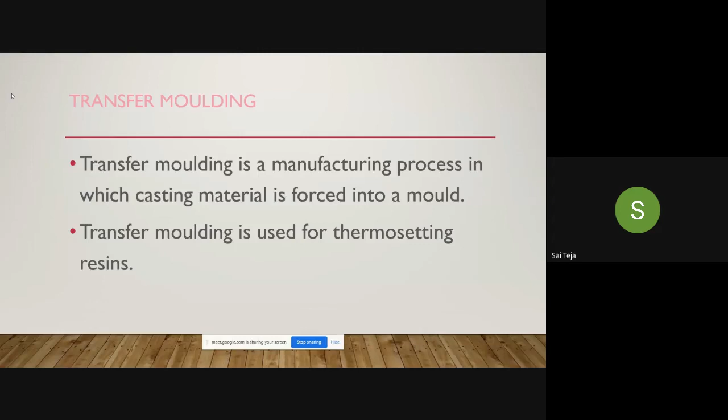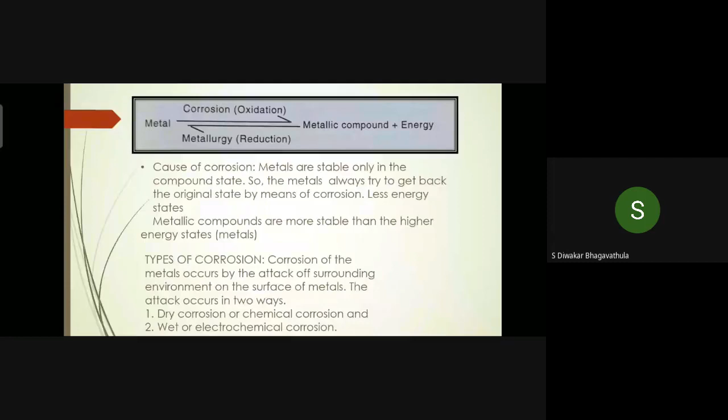Initially, when we are extracting metals, they occur in combined states as oxides, hydroxides, etc. When we want pure metal, we extract them, but metals have a tendency to be stable in their combined form, so they undergo oxidation and form metallic compounds. This process is nothing but corrosion. So metal always tends to corrode and go back to the combined state. If by reduction we get the metallic compound back to the metal, so the reverse process of extracting metal from the metallic compound is corrosion.

Generally, the causes of corrosion: metals are stable only in their compound state, so they get back to their original state by the means of corrosion.

Less energy states, metallic compounds are more stable than higher energy states. Higher energy state means metals; low energy state means their combined forms.

Types of corrosion: corrosion of metals occurs by the attack of the surrounding environment on the surface of the metals. Generally these are of two types: dry corrosion and wet corrosion. Dry corrosion is also known as chemical corrosion, and wet corrosion is electrochemical corrosion.

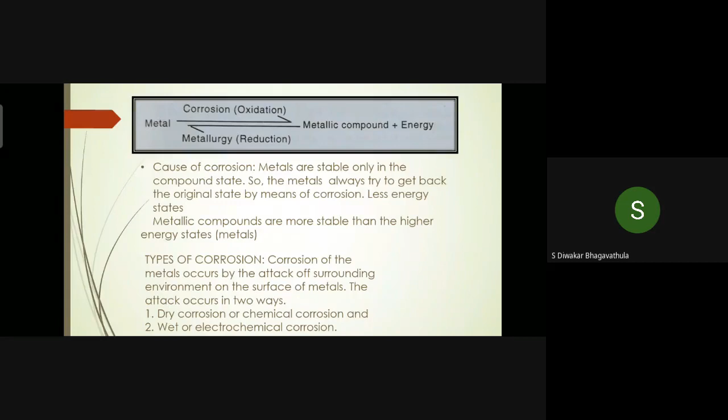As my topic is dry corrosion, I am going to explain dry corrosion. This type of corrosion occurs mainly through the direct chemical action of atmospheric gases such as oxygen, halogens, etc. on anhydrous inorganic liquids with metal surfaces in immediate proximity.

The extent of corrosion depends on two qualities: the chemical affinity between the corrosive environment and the solid metal.

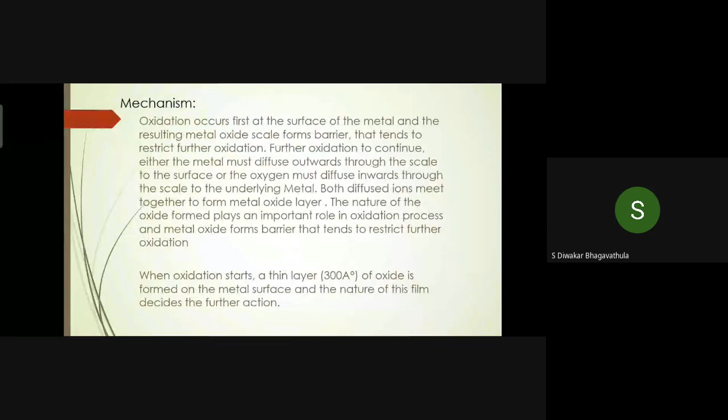The oxidation starts, a thin layer of oxide is formed on the metal surface, and the nature of this film decides the further action.

Here, metal plus oxygen gives metallic oxide near the surface of the metal, which is the corrosion product. That film decides whether the metal should further oxidize, corrode, or not.

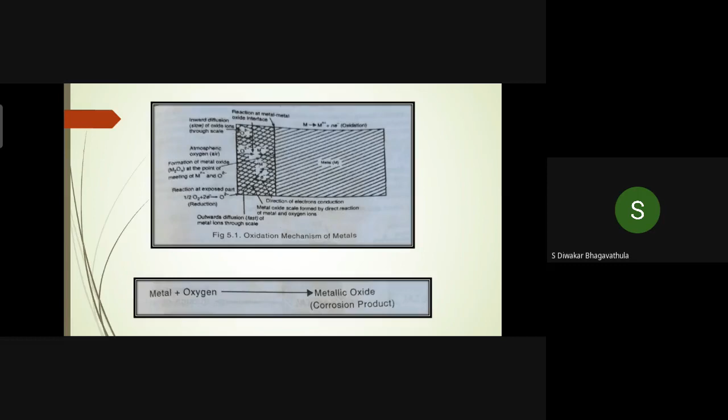This film is of four types generally: unstable oxide, stable porous oxide, volatile oxide layer, and so on. First, unstable oxide: if the oxide layer is formed and decomposed back into metal and oxygen, then the film is called unstable oxide.

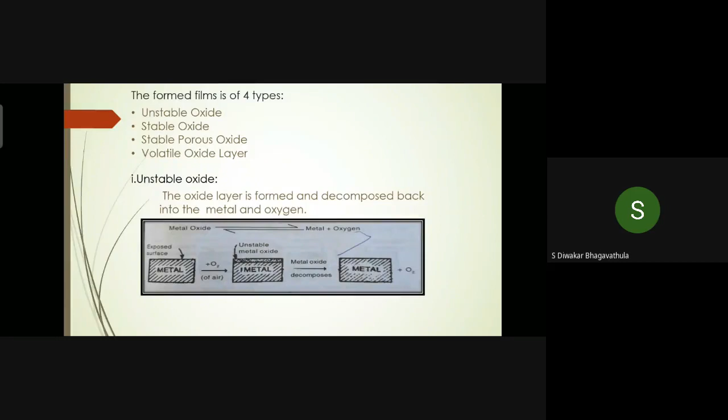Stable oxide: a stable, non-porous oxide layer adheres tightly to the metal surface and forms an impervious layer. When the film is stable non-porous oxide, it sticks tightly to the surface of the metal, so it prevents the metal surface from any further contact with atmospheric oxygen. It does not allow atmospheric oxygen to react with the metal anymore. Such a film behaves as a protective coating in nature, thereby shielding the metal surface.

Aluminium, tin, lead, copper, etc. are examples of this. Their metal oxide films are stable, adherent, non-porous, and impervious in nature. Consequently, further oxidation is prevented. So, a stable oxide layer prevents further oxidation of the metal.

Stable porous oxide. Stable porous oxide layers have pores and cracks. In such cases, atmospheric oxygen has access to the underlying surface of the metal through the pores or cracks of the layer. Thereby, corrosion continues unobstructed till the entire metal is converted into oxide.

These stable porous oxides have small pores through which atmospheric air can react with the metal. It does not stop until the metal gets fully corroded. That means the metal is completely converted into oxide. Alkali earth metal oxide layers. Further attack will go on continuously from these pores or cracks.

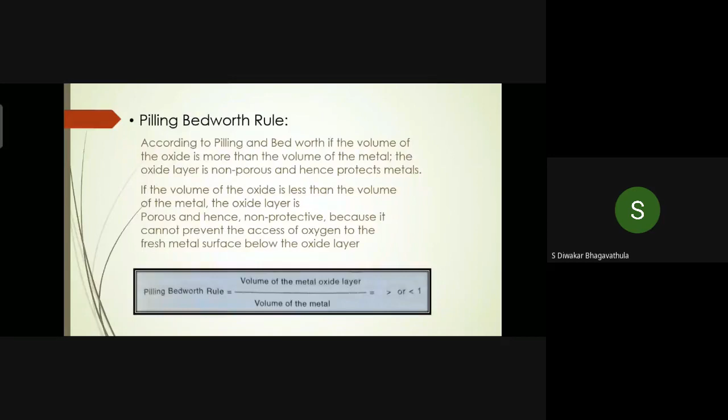The formula is given there. Pilling-Bedworth ratio is volume of the metal oxide layer by volume of the metal. If it is greater than 1, it is non-porous, and if it is less than 1, it is porous. So according to this we can say whether a metal can corrode easily or not. If you know the volume of the metal oxide layer and the metal, we can know that.

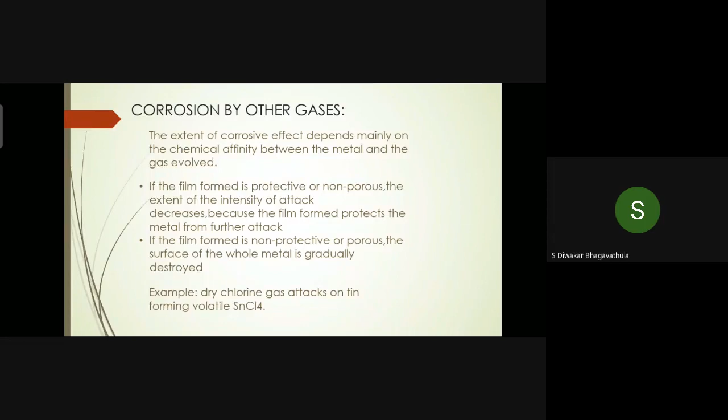Coming to corrosion by other gases, the extent of corrosive effect depends mainly on the chemical affinity between the metal and the gas evolved. If the film formed is protective and non-porous, the intensity of attack decreases because the film protects the metal from further attack. If the film formed is non-protective and porous, the surface of the whole metal is gradually destroyed by corrosion. Example, dry chlorine gas attacks tin forming volatile SnCl4.

Liquid metal corrosion. It is due to chemical action of flowing liquid metal at high temperature on solid metal or alloy. Such corrosion has been found to occur in devices used for nuclear power. The corrosion reaction involves either dissolution of the solid metal by the liquid metal, or internal penetration of liquid metal into the solid metal. If the solid metal has some pores or holes, when liquid goes inside, the metal tends to corrode.

Thank you. Okay, ma. Any questions regarding this chemical corrosion? No questions? Okay, I have one question. Yes, sir.

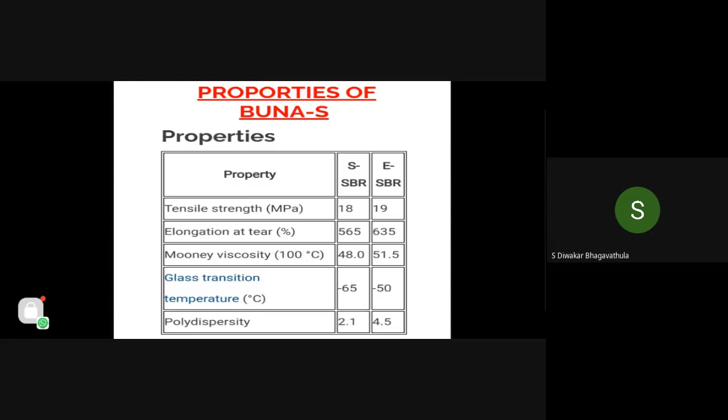Properties of Buna-S. There are several properties like tensile strength, elongation at tear, viscosity, glass transition, and polydispersity. And let us discuss what is Buna-S. The monomers are 1,3-butadiene and styrene. It is formed by the polymerization of 1,3-butadiene and styrene in the ratio of 3:1 in the presence of sodium. And Buna-S is an example of copolymers.

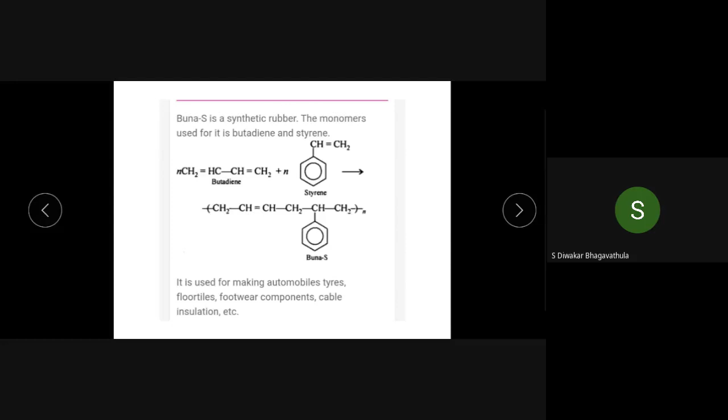It is also called styrene butadiene rubber. It has significantly less resistance to friction than natural rubber. It is used for making automobile tires and rubber soles. Its commercial name is SBR. And let us see the structure of butadiene and styrene. This is the structure of butadiene, and this is the structure of styrene. Butadiene and styrene undergo copolymerization to form Buna-S.

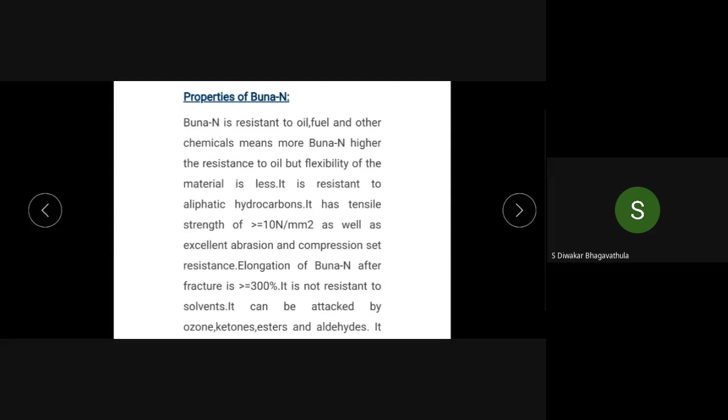Properties of Buna-N. Let us see what is Buna-N first, and discuss afterwards. Buna-N is an elastomer, and I forgot to say that Buna-S is also an elastomer. Buna-N is known as nitrile rubber. It forms due to the copolymerization of acrylonitrile and 1,3-butadiene.

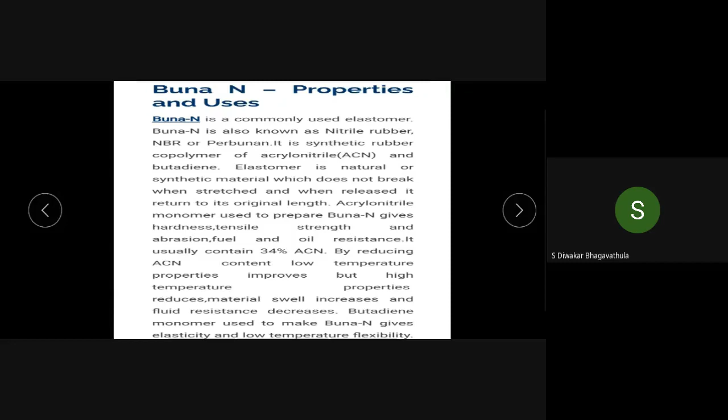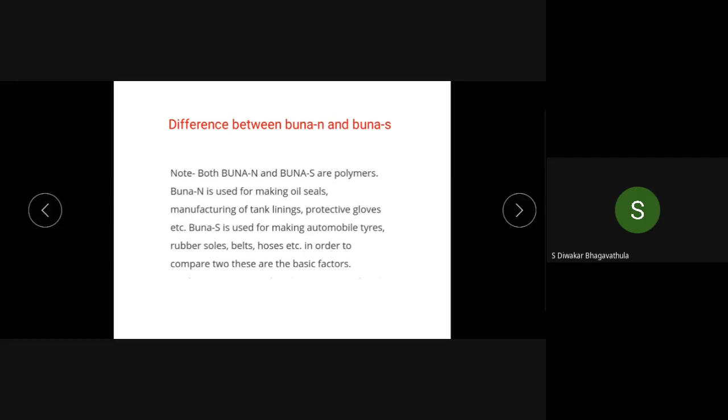The difference between Buna-N and Buna-S. Both Buna-N and Buna-S are polymers. Buna-N is used for making oil seals, manufacturing of tank linings, protective gloves, and Buna-S is used for making automobile tires, rubber soles, belts, hoses, etc. In order to compare the two, these are the basic factors.

And what are the uses of Buna-S and Buna-N? Buna-S is used for making automobile tires, rubber soles, belts, hoses, as we discussed previously. And to compare the two, these are the basic factors.

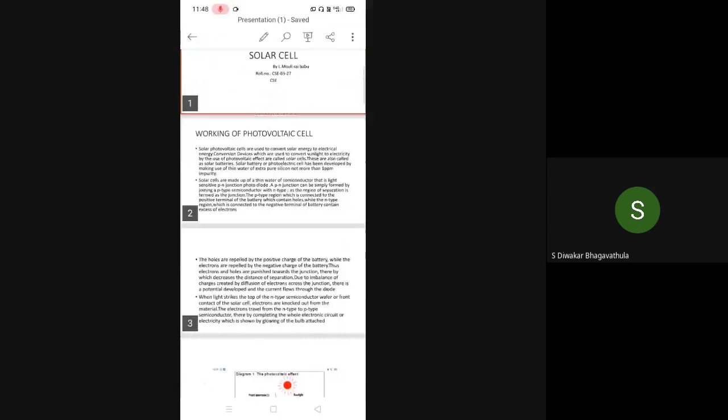Good morning, sir. My name is L. Mouli Sai Babu from CSE C section. My topic is working and construction of photovoltaic cell or solar cell. Working of photovoltaic cell. Solar photovoltaic cells are used to convert solar energy to electrical energy.

Mauli. Yes. Can you expand your screen or can you rotate your screen so that we can see it very clearly?

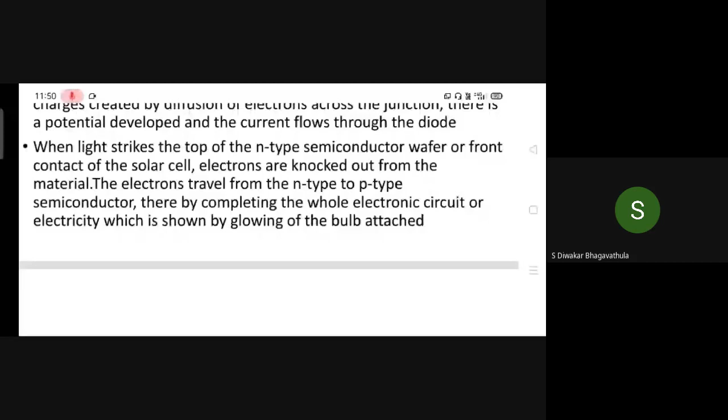Thus electrons and holes are pushed towards the junction, which decreases the distance of separation. This means formation of a depletion region due to the imbalance of charges created by diffusion of electrons. Across the junction, a potential is developed and current flows through the diode. When sunlight strikes the top of the n-type semiconductor wafer or front contact of the solar cell, electrons are knocked out from the material. The electrons travel from n-type to p-type semiconductor, completing the circuit, which is shown by the glowing of an attached bulb.

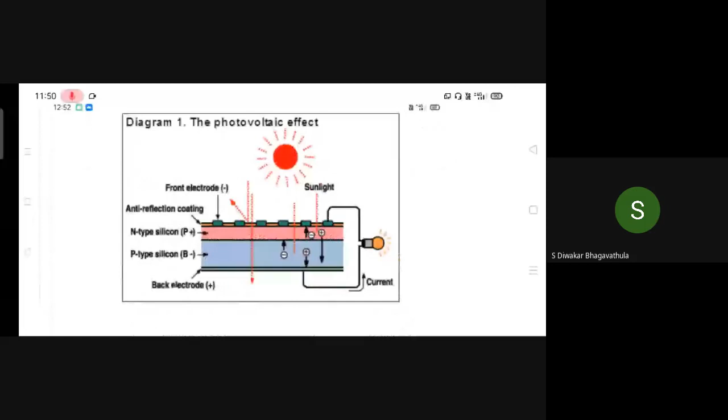Now this is the diagram, sir. N-type and p-type. The sunlight is falling on the n-type and the electrons are moving towards the p-type junction. The n-type is doped with elements like arsenic or phosphorus, and the p-type is doped with boron or aluminum, etc. Each solar cell is very small, and a series combination of many such solar cells gives rise to a photovoltaic module or solar battery. So solar energy can be converted directly into electrical energy by photovoltaic cells.

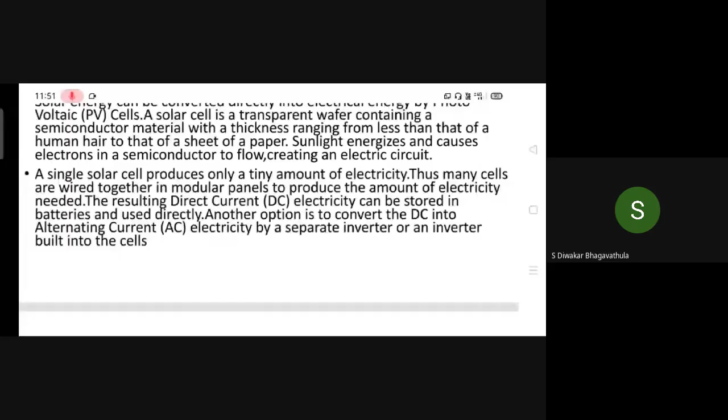A solar cell is a transparent wafer containing a semiconductor material with a thickness ranging from less than that of a human hair to that of a sheet of paper. Sunlight energizes and causes electrons in a semiconductor to flow, creating an electric circuit. Meanwhile, electricity is stored and the bulb glows, as in the diagram.

A solar system contains many parts: solar array, a blocking diode, battery storage, load, power conditioning, switch and circuit breaker. Your voice is breaking. Your voice is breaking.

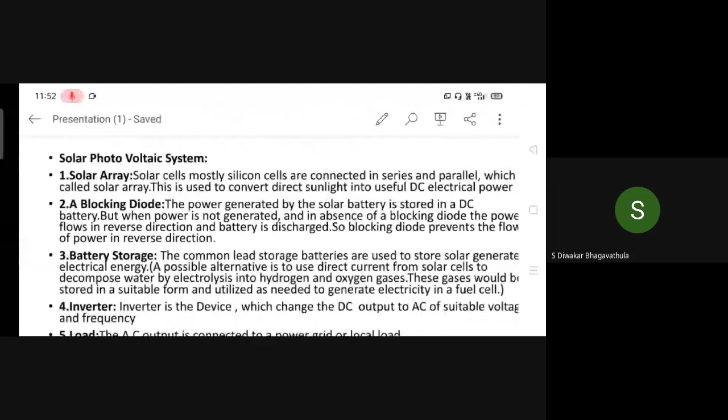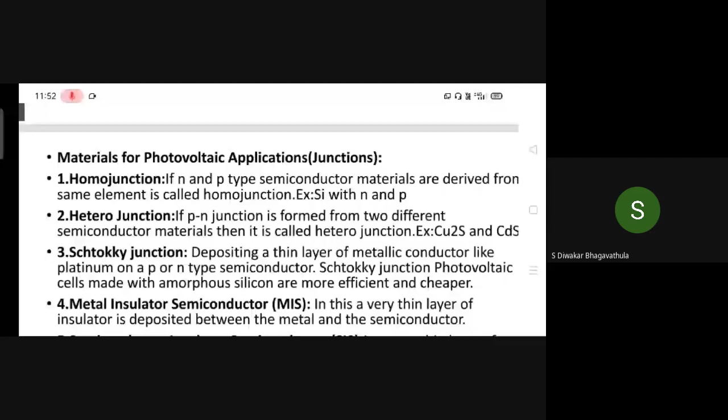Solar photovoltaic system. They contain many parts: solar array, a blocking diode, battery storage, power conditioners and circuit breakers. The material junctions: homojunction. If N and P type semiconductors are derived from the same element, it's called a homojunction, for example silicon with N and P. Heterojunction: if a p-n junction is formed from two different semiconductor materials, it is called a heterojunction. Example: Cu2S and cadmium sulfide.

Schottky junction: depositing a thin layer of a metallic conductor like platinum on a P or N type semiconductor. Schottky junction photovoltaic cells made with amorphous silicon are more efficient and cheaper. Metal insulator semiconductor: a very thin layer of insulator is deposited in between the metal and the semiconductor. Example, tin oxide in between silicon. Liquid interface solar cells are formed using the top surface of a liquid.

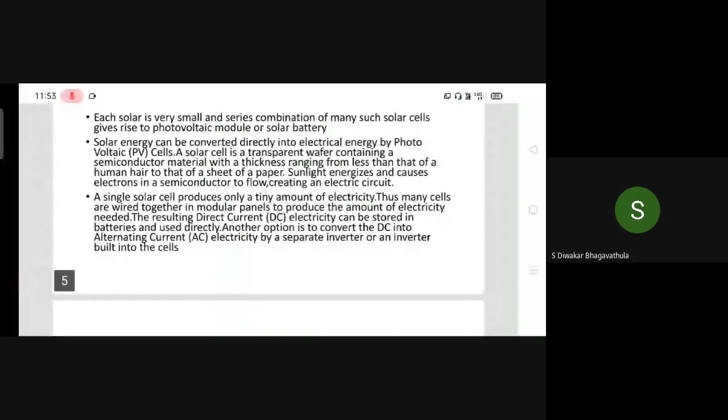Solar energy applications, for example: flat plate collector for water heating by solar energy, solar cooker, solar furnace, solar power plant, and solar cells and solar panels. Materials used in solar cells: silicon. Over 95% of cells in commercial production are silicon p-n junction, while consumer items are now using amorphous silicon p-n cells. Band gap is 1.1 electron volt. Experiments have demonstrated that a silicon cell could convert about 15% of terrestrial sunlight into electricity.

And silicon cells of N or P type structure are used, along with gallium arsenide, cadmium sulfide, and cadmium selenide, etc. Thank you. So, any questions regarding these solar cells? Doubt, sir.

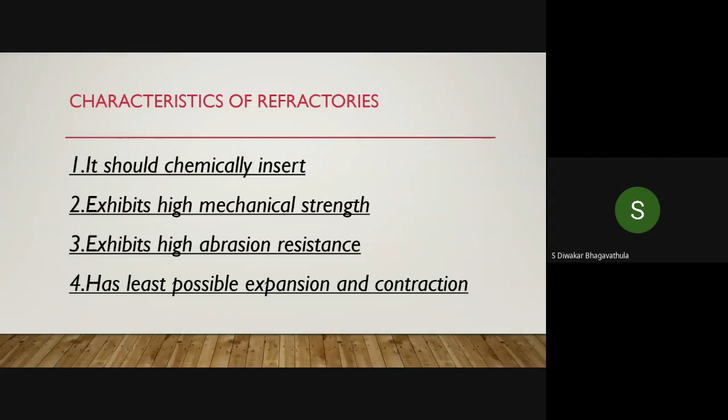Characteristics of refractories: they should be chemically inert, exhibit high mechanical strength, exhibit high abrasion resistance, and have the least possible expansion and contraction. Types of refractories based on chemical composition or nature are classified into 3 types: acidic refractory, basic refractory, neutral refractory.

Acidic refractories consist mostly of acidic materials and are used only in acidic environments. Example: fire clay, SiO2, etc.

Basic refractories consist mostly of basic materials and are used in basic environments. Example: magnesium oxide, dolomites, etc.

Neutral refractories consist of neutral raw materials and are used in both acidic and basic environments. Example: graphite, zirconia, SiC, etc.

Based on fusion temperature, refractories are classified into 3 types: low refractories, high refractories, and super refractories. Low refractories are at a temperature of 1600 to 1800 degrees centigrade, example fire clay. High refractories are at 1800 to 2000 degrees centigrade, example chromites and silica. Super refractories are at temperatures greater than 2000 degrees centigrade.

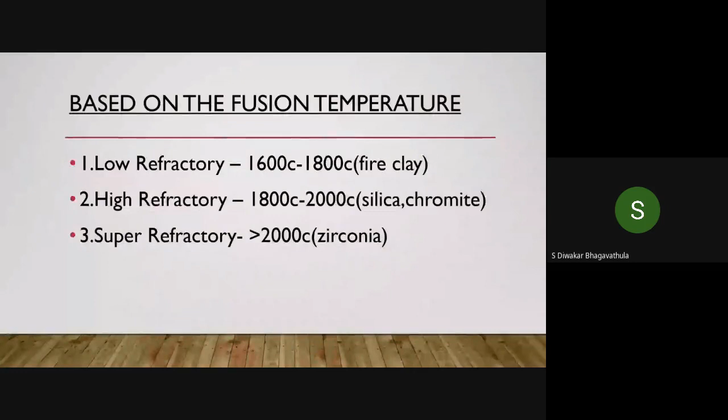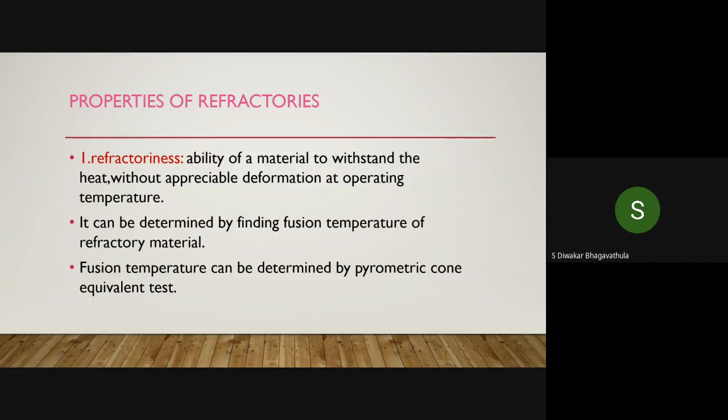Example: zirconia. Now the properties of refractories. First, refractoriness: the ability of a material to withstand heat without appreciable deformation at operating temperature is called refractoriness. It can be determined by finding the fusion temperature of the refractory material, which is determined by the pyrometric cone equivalent test.

The temperature at which the refractory deforms under its own weight is known as the fusion temperature. These cones are pyramidal, having a height of 38 millimeters, a triangular base, and 19 millimeter long sides. They are heated under 10 degrees per minute, and as a result undergo fusion at different temperatures. This temperature at which fusion or softening of the test cone occurs is shown by the apex touching the base. So the temperature at which the apex touches the surface is the fusion temperature, and by that we find the refractoriness of the refractory material.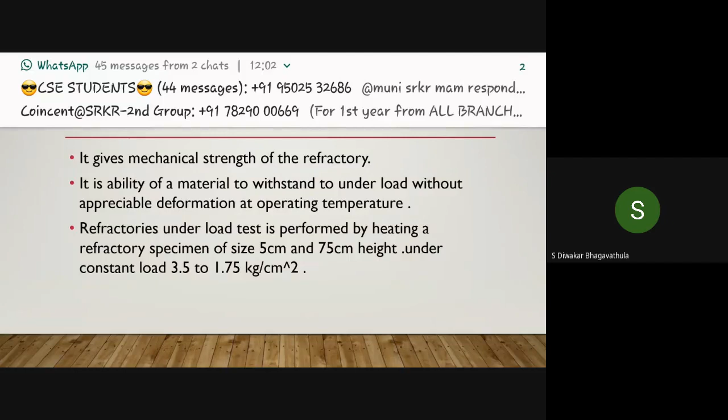Refractoriness under load, or strength, gives the mechanical strength of the refractory. It is the ability of a material to withstand load without appreciable deformation at operating temperature. The refractoriness under load test is performed by heating a refractory specimen of size 5 cm square and 7.5 cm height under a constant load of 1.75 to 3.5 kg per centimeter square, and it can be found by plotting a graph between deformation height of the refractory and the temperature.

Next, dimensional stability: resistance to any volume change at operating condition is called dimensional stability. Permanent expansion occurs when one crystalline form of a refractory is transformed into another crystalline form of lower density. Example: quartz to tridymite to cristobalite. The specific gravity of quartz is 2.65 and cristobalite is 2.32, so the decrease in density causes permanent expansion.

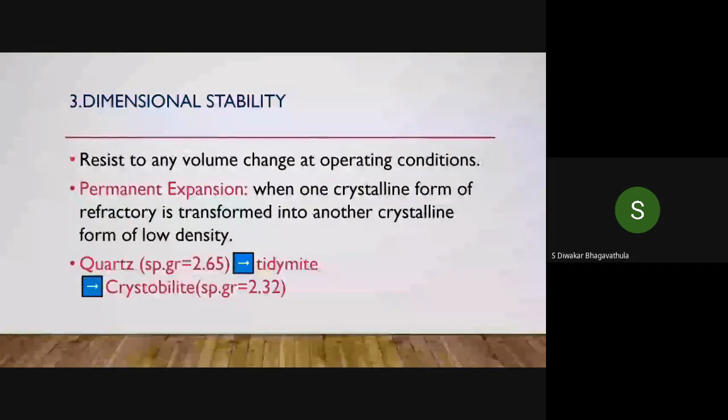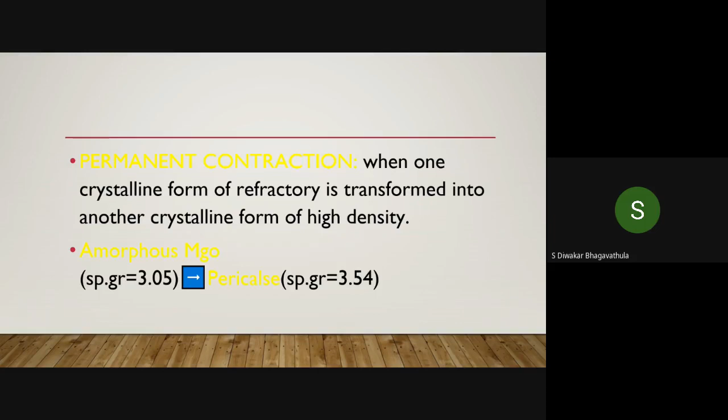Next, permanent contraction: when one crystalline form of a refractory is transformed into another crystalline form of higher density, it is called permanent contraction. Example: amorphous magnesium oxide to periclase. The specific gravity of magnesium oxide is 3.05 and periclase is 3.54, so the increase in specific gravity causes permanent contraction.

Next, porosity: porosity is the ratio of pore volume to bulk volume, P equals W minus D by W minus A into 100. W stands for weight of the saturated specimen, D stands for weight of the dry specimen, A stands for weight of the saturated specimen submerged in water. It is a very important property of refractory bricks because it affects many other characteristics like chemical stability, strength, abrasion resistance, etc. So a good refractory generally has low porosity.

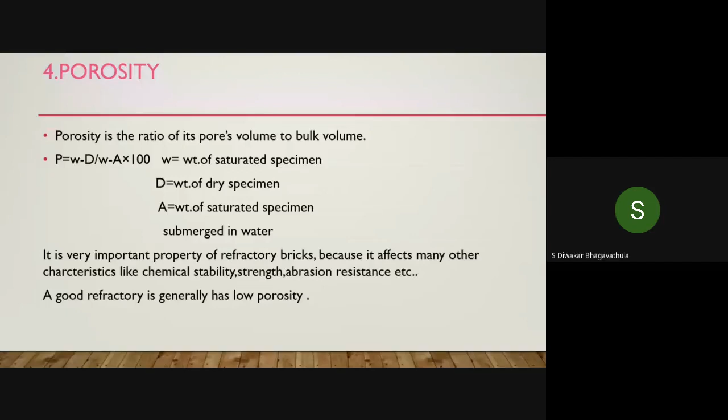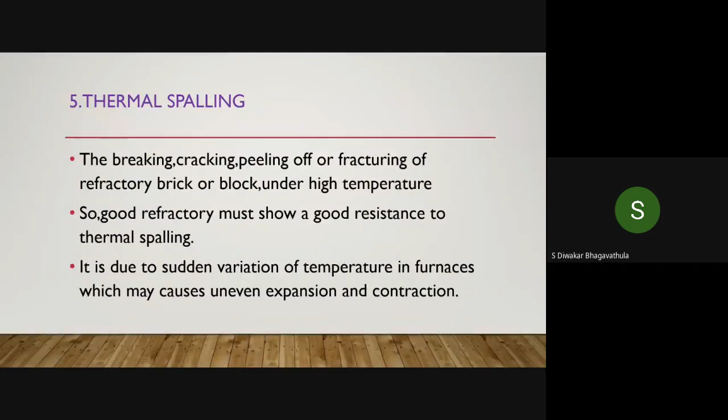Thermal spalling is the breaking, cracking, peeling off, or fracturing of a refractory brick or block under high temperature. A good refractory must show good resistance to thermal spalling. Thermal spalling occurs due to sudden variation of temperature in furnaces, which causes uneven expansion and contraction. These are the properties of refractories. Thank you.

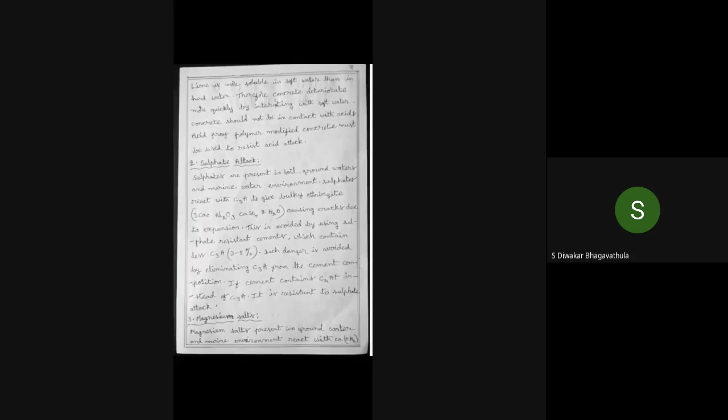Third type of attack: magnesium salts attack. Magnesium salts are present in groundwater and marine environments, and react with calcium hydroxide to give magnesium hydroxide, which does not have binding properties. Magnesium salts destroy tricalcium silicate, dicalcium silicate, and tricalcium aluminate.

The fourth type of attack is due to carbon dioxide. Diffusion of carbon dioxide into concrete and conversion of calcium hydroxide to calcium carbonate is called carbonation. This carbonation in a specific concrete structure depends on the porosity of the concrete. Good quality concrete is less porous, and the diffusion would be less.

In the absence of hydroxides due to carbonation, the cement lacks calcium hydroxides. So the iron oxide coating becomes porous and non-protective, and this leads to the deterioration of concrete.

The fifth type of attack is chloride attack. Chlorides enter the concrete through water used for construction and diffusion from the environment. Chlorides diffuse through porous and low quality concrete and reach the reinforcement. In presence of chlorides, the protective oxide layer around iron becomes less protective and porous, causing electrochemical corrosion of iron.

This is why we should take care not to use soft water during curing of cement. For protecting the concrete, we must follow certain measures by giving a coating of bituminous material. In these processes, our main aim is to reduce the contact between concrete and air, so we use the process of adding bituminous materials on concrete.

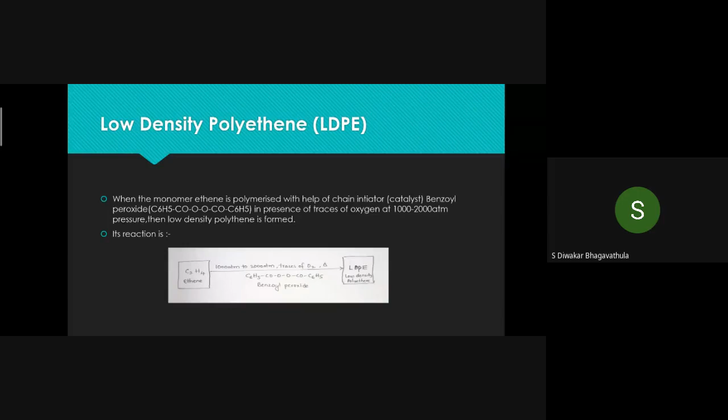Properties and uses of low density polythene. Low density polythene has a melting point around 110 to 125 degrees centigrade, and it is 40% crystalline, so it is a soft and waxy solid. Its density is around 0.91 to 0.92 grams per milliliter. It is insoluble in any solvents at room temperature. It is used for films, table clothing, packing materials, squeeze bottles, pipes, etc.

Then high density polythene. The monomer ethene is polymerized with the help of a chain initiator, Ziegler-Natta catalyst, which is a mixture of triethyl aluminum and titanium tetrachloride, at 6 to 7 atmospheric pressure. Then high density polythene is formed as the reaction follows.

Its properties are: melting point is around 144 to 150 degrees centigrade, and it is 90% crystalline, so it is rigid. Its density is 0.965 grams per milliliter, and it is chemically more resistant than low density polythene. It is used for films, detergent bottles, pipes, industrial clothing and filters, etc.

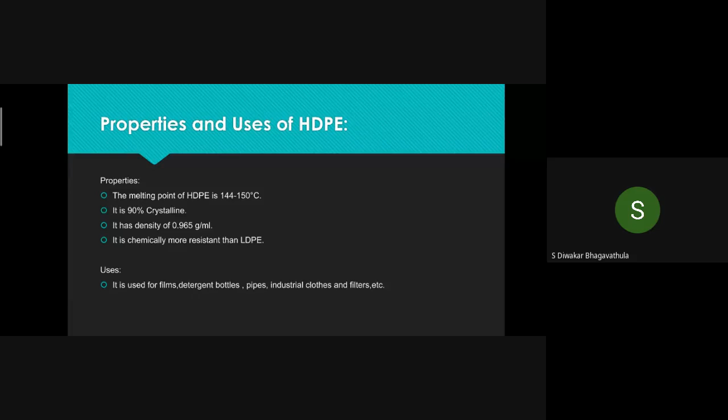PVC is obtained when a water emulsion of vinyl chloride is heated in the presence of a chain initiator, that is a catalyst, benzoyl peroxide or hydrogen peroxide, and its reaction is as follows.

Properties and uses of polyvinyl chloride. PVC is insoluble in alcohol, water, and hydrocarbons. As it is insoluble in water, it is also useful to prepare materials which are waterproof. It is soluble in chlorinated hydrocarbons and ketones. It is colorless, odorless, non-flammable, and chemically inert, with resistance to light and atmospheric oxygen.

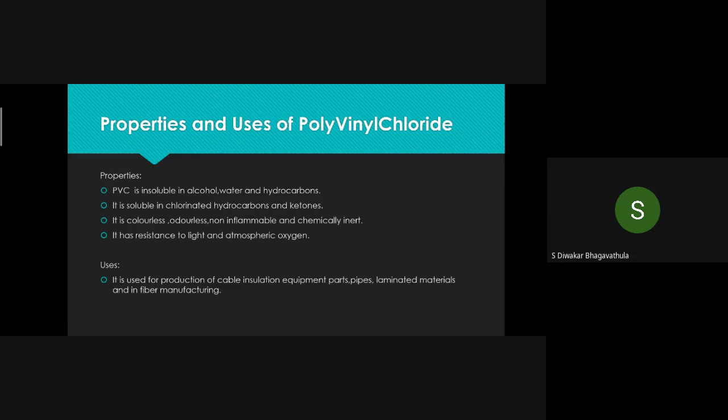Its uses: it is used for production of cable insulation equipment parts, pipes, laminated materials, and in fiber manufacturing. That's it, thank you.

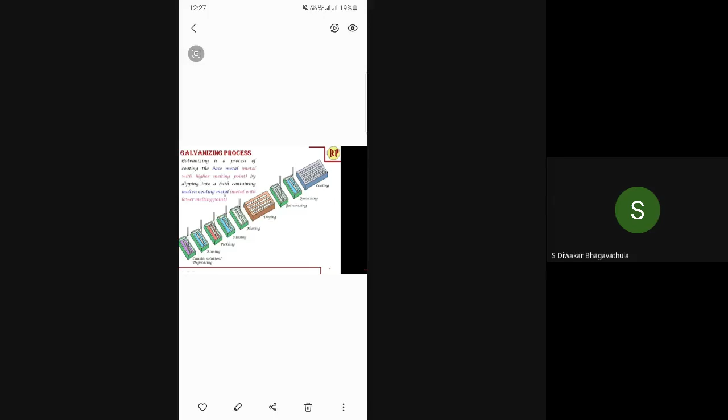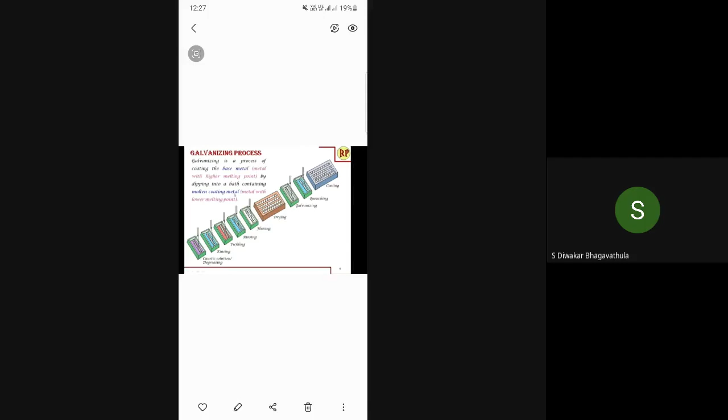Later, the metal is dipped in the galvanizing bath to add zinc coating to the metal. Here in the galvanizing bath, the zinc and iron diffuse and form zinc-iron alloys. Later it is quenched so as to harden the topmost layer of the metal, and finally it is cooled. After these steps, a thick layer of zinc is coated strongly over the base metal. This is the galvanizing process, and let us know about its uses.

Galvanizing materials are used in steel wires, pipes, nails, screws, nuts, and bolts, and then steel frames and rooftops for construction. There is a note in galvanized materials: they must not be used to store acidic foodstuff, because zinc is a more active metal, so it dissolves with the acidic foodstuff and poisons the food. This is about galvanizing.

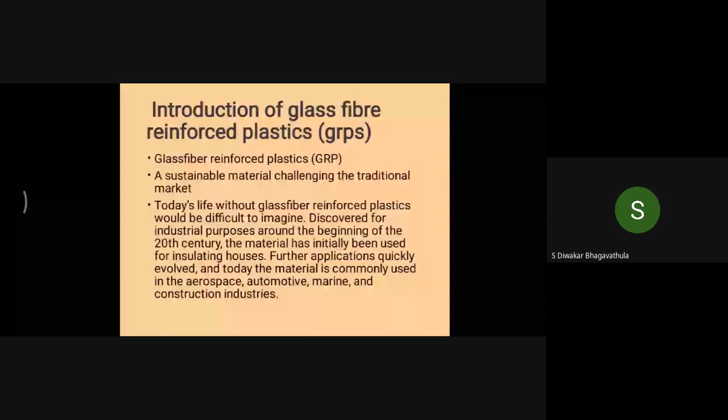Let us see what these glass fiber reinforced plastics are made up of. It is a composite material that consists of a polymer matrix and glass fibers. The polymer matrix is usually epoxy, vinyl ester, or polyester thermosetting resin, and these resins bring environmental and chemical resistance to the product. The glass fibers add strength to the composite, serving as the reinforcing material. The most common type of glass fiber used for GRP is E-glass, which is aluminum borosilicate glass.

Next, why are glass fiber reinforced plastics so strong? As compared to many other materials, the polymer matrix resins and glass fibers complement each other to form stronger compounds. These resins are strong in compressive loading, and the glass fibers are very strong in tension, so glass fiber reinforced plastic becomes a material that resists both compressive and tensile forces very well.

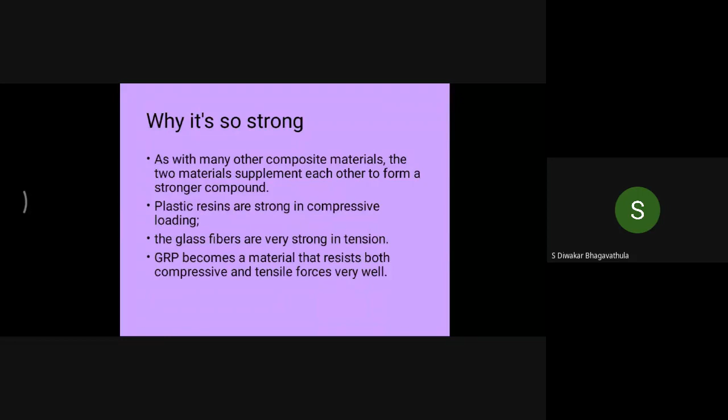Let us see the characteristic properties of glass fiber reinforced plastics. They have many beneficial characteristics: very low weight with high mechanical strength, resistance against chemicals and corrosion, UV radiation resistance, temperature stability, and environmental friendliness.

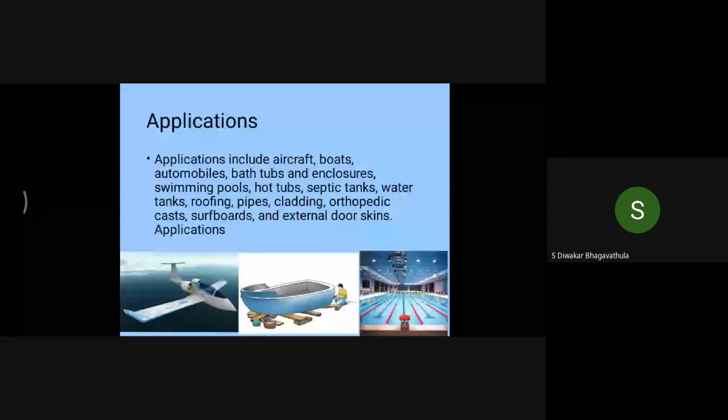Now let us see about carbon fiber reinforced plastics. These carbon fibers were developed in the mid 1960s. The composite properties are mainly influenced by the choice of fibers. This CFRP is a lightweight, high strength composite material.

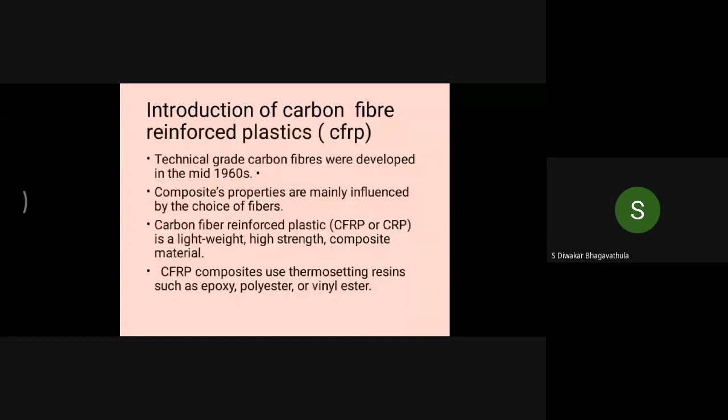Let us see what it is made up of. It is a composite material made up of polymer matrix and carbon fiber. 90% of carbon fibers are produced from polyacrylonitrile. The polymer matrix we use is usually epoxy.

One method of producing carbon fiber reinforced parts is by layering sheets of carbon fiber cloth into a mold in the shape of the final product. Here cloth fiber is used to optimize strength and stiffness properties of the resulting material. Then the mold is filled with epoxy and heated to get the final product.

Let us see some properties of carbon fibers. They have excellent tensile properties, low densities, high thermal and chemical stabilities in the absence of oxidizing agents, and they also have good thermal and electrical conductivities and excellent creep resistance.

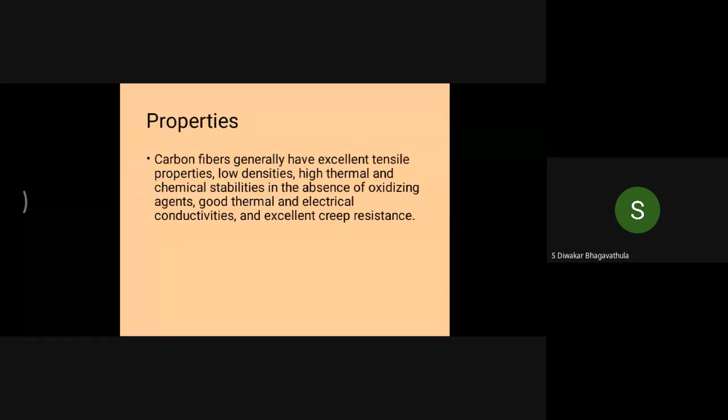Let us see some advantages. There are mainly four advantages. First is strength: these carbon materials are very tough and strong. Second is weight: despite its strength, carbon fibers are actually very light in weight. Third is stress resistance: parts made from carbon fiber are less prone to wear and tear. Fourth is corrosion resistance: carbon fiber is durable in corrosive environments too.

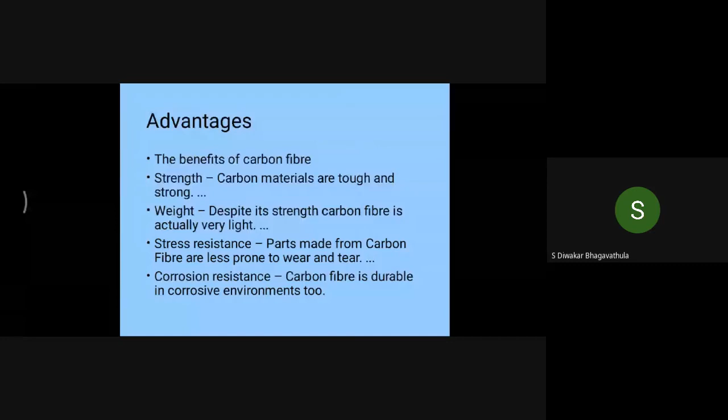Let us see the applications of carbon fiber. These are used in sporting equipment, automotive parts, aerospace engineering, civil engineering, medical applications, environmental applications, and also things at home. Here are some of the examples we can see.

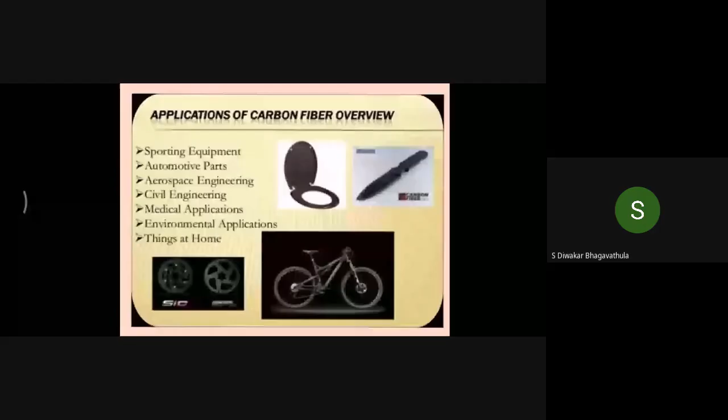The difference between carbon fiber reinforced plastics and glass fiber reinforced plastics. They differ in properties. Carbon fiber reinforced plastics are lightweight with low density, whereas glass fiber reinforced plastics have medium weight and medium density. They also differ in reinforcing material. In CFRP, the reinforcing material is carbon fiber, and in GFRP, the reinforcing material is glass fiber.

Conductivity: carbon fiber reinforced plastics are very conductive, whereas glass fiber reinforced plastics are insulative. The cost of carbon fiber reinforced plastics is very high compared to glass fiber reinforced plastics, which are much less expensive.

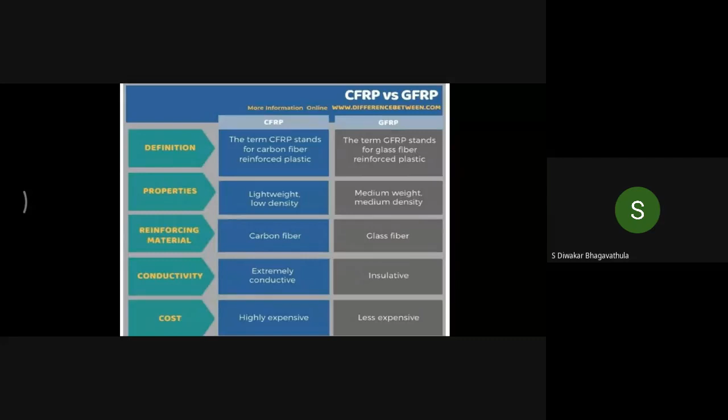What is meant by creep resistance of carbon fibers? Satish, answer this question. Sir, can you repeat the question? What is meant by creep resistance of carbon fibers? What is meant by creep resistance? That's it. Sir, I don't know, sir.

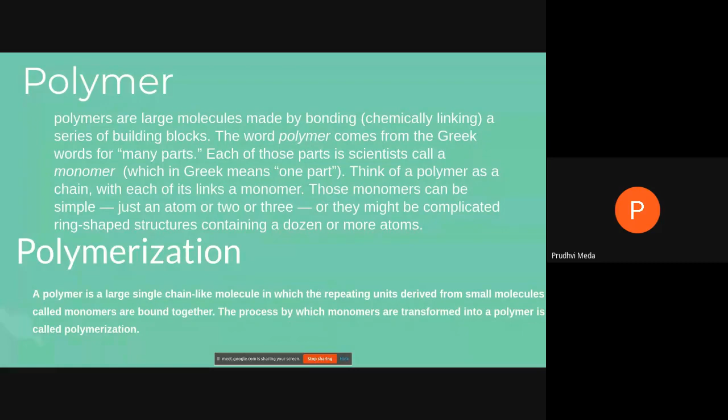There are two basic types of polymerization: addition polymerization and condensation polymerization. Buna-S and Buna-N undergo addition polymerization. A copolymer is a polymer made by addition polymerization from two different monomers, for example, Buna-N. Synthetic rubbers are also called elastomers. An elastomer is a vulcanized man-made polymer that can be stretched to at least twice its length, but returns to its original position as soon as the stretching force is released. Buna-S and Buna-N are synthetic rubbers.

Coming to the preparation of Buna-S, Buna-S rubber is a copolymer obtained by the addition of butadiene and styrene at a ratio of 3:1, 75% butadiene and 25% styrene, in an emulsion system in the presence of a free radical initiator like benzoyl peroxide with the support of dextrose, which is like glucose.

According to the temperature, we can divide the produced rubber into two types. One is cold rubber, where polymerization is carried out at minus 15 degrees Celsius to 5 degrees Celsius. At this temperature, the chain length can be controlled. If the temperature is 50 degrees Celsius, the rubber is called hot rubber, and in this case the chain reaction cannot be controlled. These synthetic rubbers are more efficient than natural rubbers.

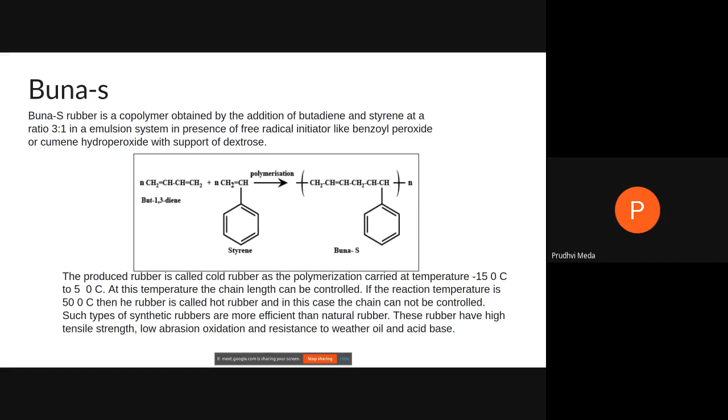Coming to the properties of Buna-S, it has high abrasion resistance. Abrasion means the process of scraping. It has high load bearing capacity and resilience. It gets oxidized in the presence of ozone. It swells in oils and solvents, and it needs more accelerators for vulcanization. It can be vulcanized by sulfur, but the quantity required is less.

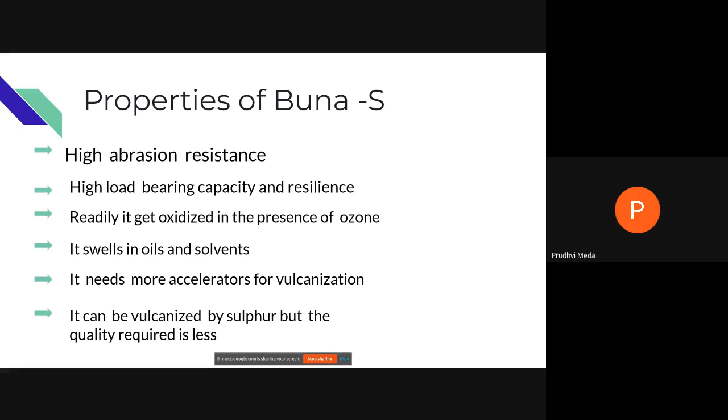Coming to the uses of Buna-S, it is usually used in tyres, shoe heels and soles, gaskets, and even chewing gums. Natural rubbers and synthetic rubbers are a little bit the same, but synthetic rubbers are more efficient when compared to natural rubbers.

It is extremely used in coated papers, being one of the most cost-efficient resins to bind the pigments in coating. Another use: it is also used in building applications as a sealing and binding agent behind renders as an alternative to PVA. PVA means polyvinyl alcohol. Additionally, it is used in some rubber cutting boards.

When it comes to the preparation of Buna-N, we can call it nitrile rubber or NBR. Nitrile butadiene rubber is a copolymer obtained by the addition of butadiene and acrylonitrile at the ratio 3:1 in an emulsion system in the presence of a free radical initiator like benzoyl peroxide. Synthetic rubbers can be vulcanized as there is a weak pi bond present in the long backbone polymer chain. By observing this diagram, we can see what process has been done here.

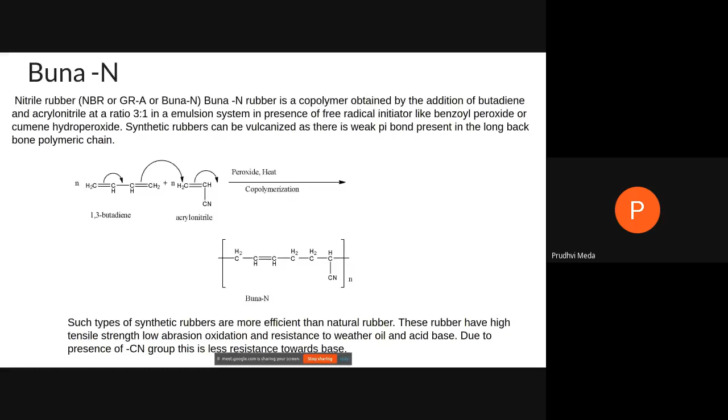When we come to the properties of Buna-N, nitrile is a family of unsaturated copolymers of 2-propenenitrile and butadiene monomers. Its physical and chemical properties depend on the polymer's composition of nitrile. The more nitrile there is within the polymer, the higher its resistance to oils, but the lower its flexibility. When you come to flexibility, it is very low.

The next property: nitrile rubber is more resistant than natural rubber to oils and acids, and it has superior strength. So by reading this line, we can say that nitrile rubber is more resistant than natural rubber to oils and acids, and it has superior strength, it is very strong, but suffers from inferior flexibility.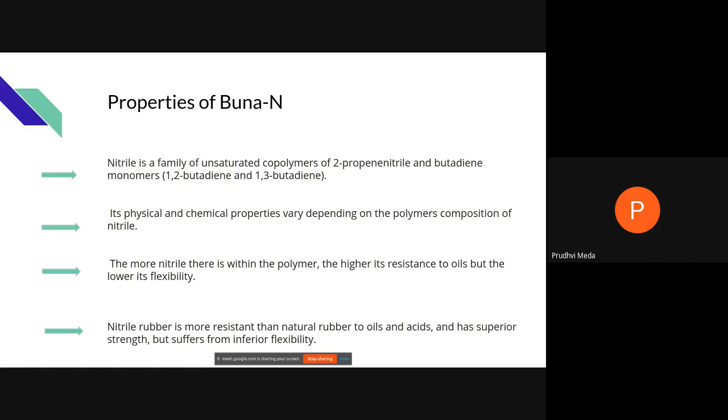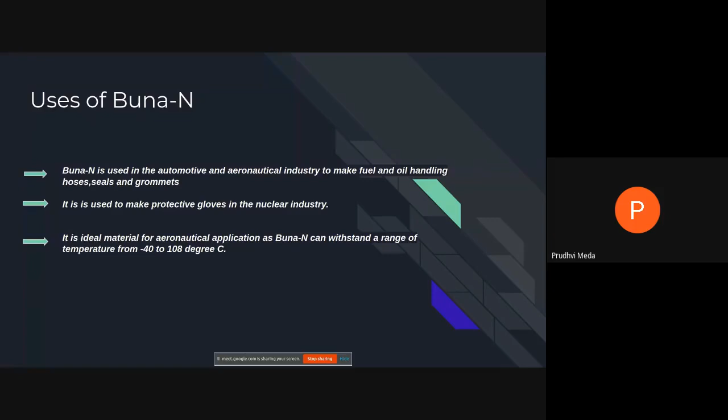Coming to the uses, Buna-N is used in automotive and aeronautical industries to make fuel and oil handling hoses, seals, and grommets. Next, it is used to make protective gloves in the nuclear industry. It is an ideal material for aeronautical applications, as it can withstand a range of temperatures from -40 to 108 degrees Celsius.

From the previous slides, we can state the differences between Buna-S and Buna-N. For Buna-N, the monomers are 1,3-butadiene and acrylonitrile. The 1,3-butadiene is the same, but the other monomer differs. Buna-N is also called nitrile butadiene rubber, and Buna-S is also called styrene butadiene rubber. Buna-N is formed by polymerization of 1,3-butadiene and acrylonitrile in the presence of sodium. Buna-S is formed by polymerization of 1,3-butadiene and styrene in the ratio 3:1 in the presence of sodium.

When it comes to the uses, they are different. Buna-N and Buna-S have different uses, and they are very useful polymers compared to others. Buna-N is more useful in making oil seals and manufacturing tanks. In Buna-S, these materials are used for making automobile parts.

Thank you, sir. Okay, sir. This is the last one. Anusha, 57. Hello, sir. Hello. Okay, my screen is visible, sir? Yeah, continue.

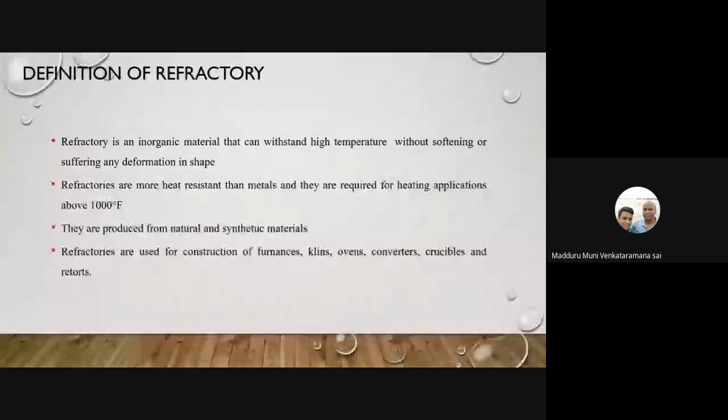The definition of refractory: a refractory is a ceramic material that can withstand very high temperatures without undergoing any chemical or physical change, like melting or deformation in shape. They don't lose their strength and their form. They can be used for construction of furnaces, kilns, ovens, converters, etc. They are produced from natural and synthetic materials. Let us move on to the characteristics of refractories.

It should be infusible at the temperature to which it is liable to be exposed, and it must be chemically inert towards the corrosive action of gases, metallic liquids, and slags which are produced in the furnaces. It should resist the abrasion action of flames, molten metal, slags, flue gases, etc.

At operating temperature, it should be able to withstand the overlying load of the structure. Refractories should not crack and suffer loss in size at operating temperature. Uniform expansion and contraction should take place while temperature rises and falls respectively. Next, classification of refractories.

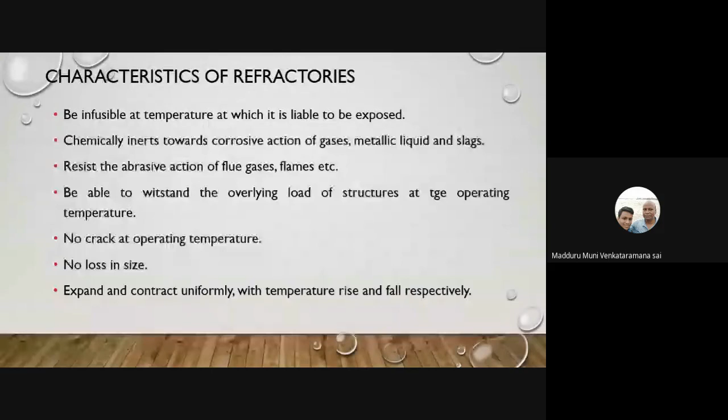Based on chemical composition, they are mainly classified into three types: acidic refractories, basic refractories, and neutral refractories. The first one is acidic refractories, which consist of acidic materials like alumina and silica, and they are generally not attacked by acidic materials but easily affected by basic materials. Examples of acidic refractories are alumina, silica, and fire clay refractories.

Basic refractories are used in areas where slags and atmosphere are basic. These are refractories which consist of basic materials like CaO, MgO, etc. These are not attacked by basic materials but severely attacked by acidic materials. Examples: magnesite and dolomite refractories.

Next, neutral refractories. They are used in areas where slag and atmosphere are either basic or acidic, and they are chemically stable to both acids and bases. These are made from weakly acidic or weakly basic materials like carbon, chromites, etc. These are not attacked by either acids or bases. Examples: graphite, zirconia, carborundum, and chromites. Now we'll go to properties of refractories.

Refractoriness. It is the ability of a material to withstand heat without appreciable deformation under particular service conditions. Refractories are mixtures of metallic oxides, so they don't have a sharp fusion temperature. Pyrometric cone test: the softening temperature of refractory materials is generally determined using the pyrometric cone test. Softening temperature is much greater than the operating temperature.

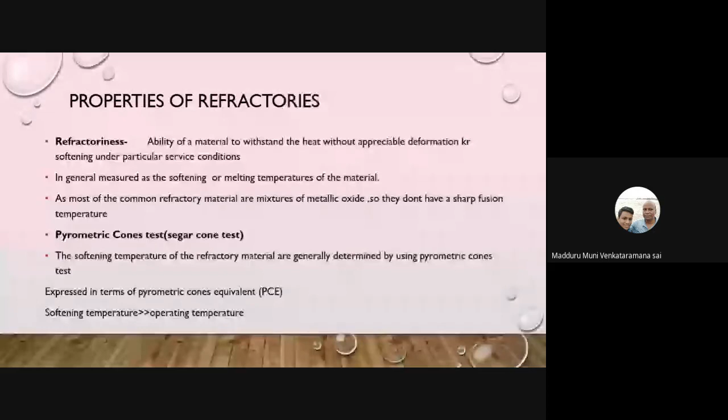Next, refractoriness under load. It is an important consideration because a refractory fails at a lower temperature when load is applied, and the material must be strong enough to resist physical wearing away and to take load. In many cases, especially in taller furnaces, the refractory has to support heavy load, and strength under the combined effect of temperature and load is an important criterion. It is also indicated by pyrometric cone equivalence.

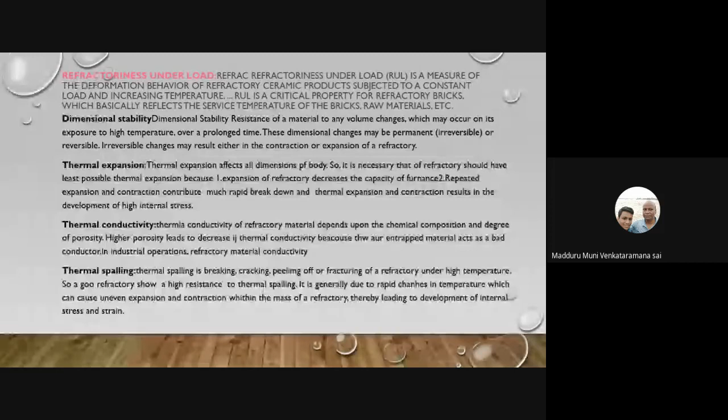Dimensional stability. Dimensional stability can be defined as the resistance of a material to any volume change on exposure to high temperature over a prolonged time. This change can be reversible or irreversible. Irreversible changes may result either in contraction or expansion of the refractory. Examples are silica bricks and magnesite bricks.

Next, thermal expansion. Solid materials expand on heating and contract on cooling. So in designing practical furnaces, a refractory material should have the least possible thermal expansion, as the expansion affects all the dimensions, length, area, and volume of the body.

Next, thermal spalling. Thermal spalling is breaking, cracking, peeling off, or fracturing of a refractory under high temperature. So a good refractory shows high resistance to thermal spalling. It is generally caused by rapid changes in temperature, which cause uneven expansion and contraction within the mass of a refractory, producing internal stress and strain.

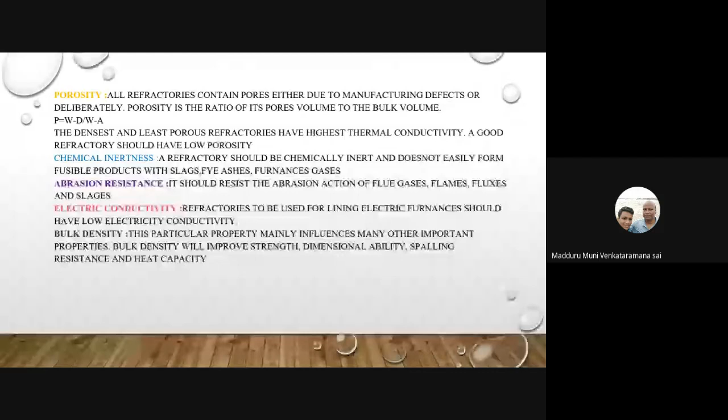Next, porosity. A refractory contains pores either due to manufacturing defects or deliberately. Porosity is the ratio of its pore volume to the bulk volume. The densest and least porous refractories have the highest thermal conductivity. A good refractory should have low porosity.

Chemical inertness. A refractory should be chemically inert and not easily form fusible products with slags and furnace gases. Abrasion resistance: it should resist the abrasion action of flue gases, flames, fluxes, and slags. Electrical conductivity: refractories used for lining electric furnaces should have low electrical conductivity.

Bulk density. This property mainly influences many other important properties. Higher bulk density will improve strength, dimensional stability, resistance, and heat capacity. Thank you.